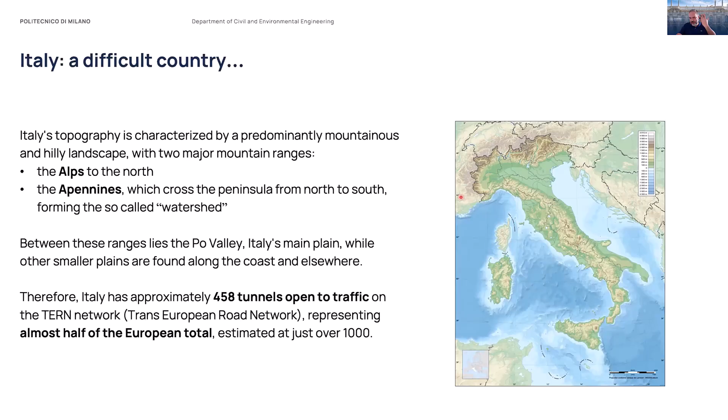As a matter of fact, if you look into the figures, you realize that Italy has approximately 458 tunnels open to traffic. We're speaking about road tunnels, which is something like slightly less than half of the European total of this trans-European road network. So it's a lot of tunnels. Actually, in this area here, I heard a statistic once that in this small area, which goes to France, we have a number of tunnels which equals the number of tunnels in whole Spain. Just to give you an idea. So tunnels is a big topic for us.

As a matter of fact, if you look at some notable projects in the last years, you realize that there's been a lot of work going on in this topic. So we have a new line from Napoli to Bari, which means basically from Naples to the other side of the peninsula, facing Albania and Greece. Then we have some new galleries in Sicily on the main direction from Palermo to Catania.

Other galleries, I would like to mention this gallery here, of which you see the data here, which goes from Milano to Genova. This is a strategic infrastructure, of course, because Milano doesn't have the sea. Genova is one of the largest ports in Italy, so you can appreciate the importance.

There is also one side effect. This allows the people from Milan to go to Genova. The people from Genova don't like the people from Milano, but they have to handle this.

The statistics here are in Italian, but you can appreciate the importance of this gallery, this Valico gallery. So we have 53 kilometers overall, 70% of which are in gallery. The speed of the train will reach something around 250 kilometers per hour. It's not the maximum of the high-speed trains in Italy, but still a lot, and it makes Milano-Genova less than 1 hour in terms of time. Here are other data, but I will move on.

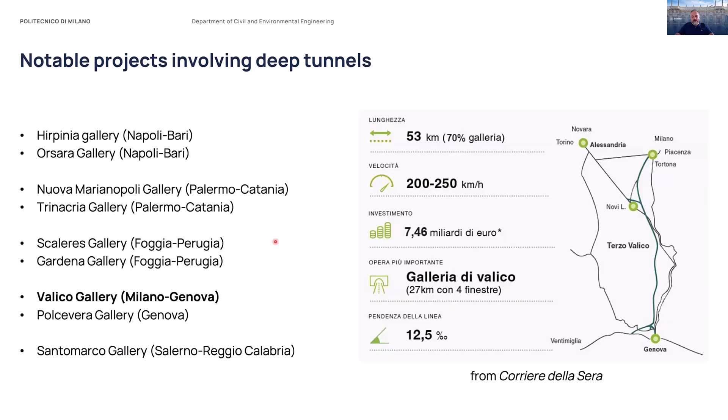And this goes well with the presentation by Thomas previously, because he spoke about shallow tunnels, so we complement each other. Just to mention that differently from some of the structures we saw before, deep tunnels have a simple geometry. Basically, you have the lining, which, if it's a deep tunnel, should usually be a circle.

Of course, there are other possible shapes, but the most optimized shape is typically the circle because of the surrounding pressure, which could be, as a first approximation, considered as a uniform pressure. And then there are typically some inner portions with vertical and horizontal partitions, which also could require some study.

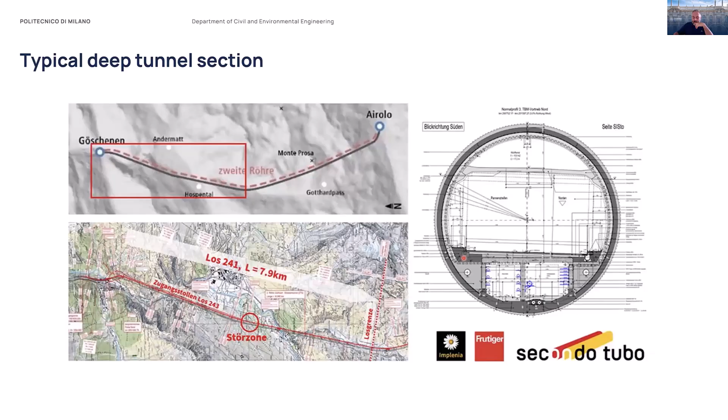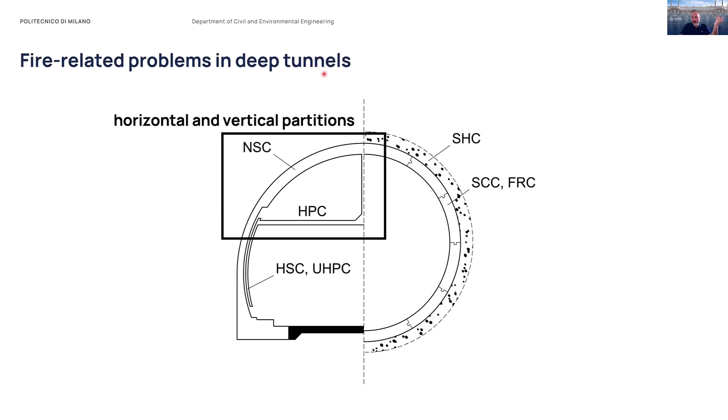So just to break down the problem into simple things, I would mention that in fire-related problems that involve deep tunnels, we are typically faced with two types of problems. You have horizontal and vertical partitions where you could face a local problem, which of course is not less important because it implies disruption of the traffic and therefore huge economic losses, not to mention the possibility of having human losses. But this problem I will not focus on because mainly from our experience, it can be tackled the way Thomas did with shallow tunnels. If I was to simplify it to the most, I would say we're talking about beam-like elements and column-like elements.

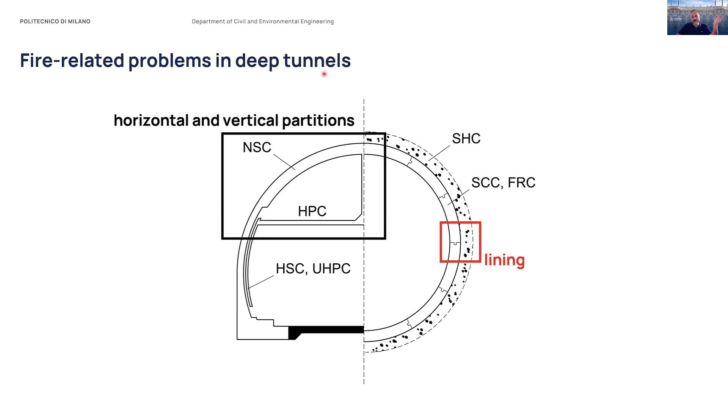What I'm going to talk about today is the lining problem, because on this type of problem, we did some work during the past years and we also compared different approaches. We are now working in a FIB group on a bulletin which should outline what the best way is to approach the problem. So I will show what has been done concerning SAFIR in terms of modeling and also in terms of main results, which are interesting to outline a little bit how the problem looks.

And inside this problem, in my opinion, and from what I saw during the last years, there is one main problem. One main problem which may appear simple, but which has to be tackled in a correct way if one wants to do things properly. And the main problem in modeling deep tunnels is the soil structure interaction.

Now, what happens typically is that the design is governed by ambient temperature conditions. And more specifically, in this respect, a key role is played by the load exerted by the soil on the lining. So what typically happens is that there is a geotechnical analysis with software. I put here two names I'm aware of. Plaxis and FLAC are probably the ones which are more often used in Italy. And then the results of this analysis are provided to the fire engineer, to the fire expert, as a sort of initial condition to be used in the structural fire analysis.

So what you receive is the geometry of the lining, and you receive a distribution of normal stresses sigma and tangential stresses tau on the outer surface of the lining. Now one has to handle this load very carefully, otherwise you will lose part of the problem.

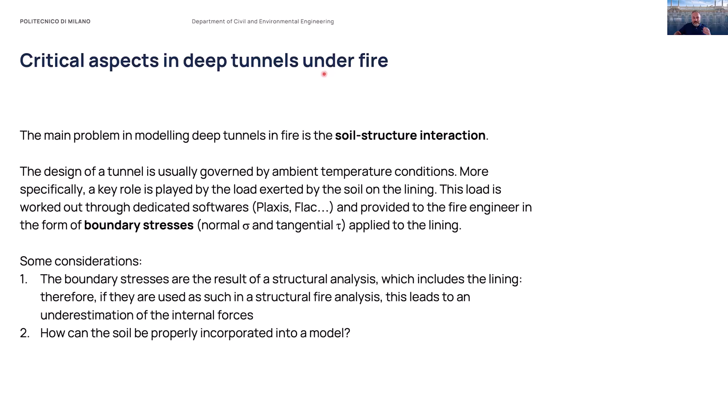And then, of course, how can the soil be properly incorporated into a model? How can it be modeled in such a way that this condition is respected and its interaction with the lining upon fire is correctly captured? For the first problem, I already spoke my mind. You should always use as boundary stresses those immediately prior to lining insertion. This is usually not a problem because the geotechnical analysis is performed in different steps, so you may ask the geotechnical people to provide some stresses before the lining is inserted.

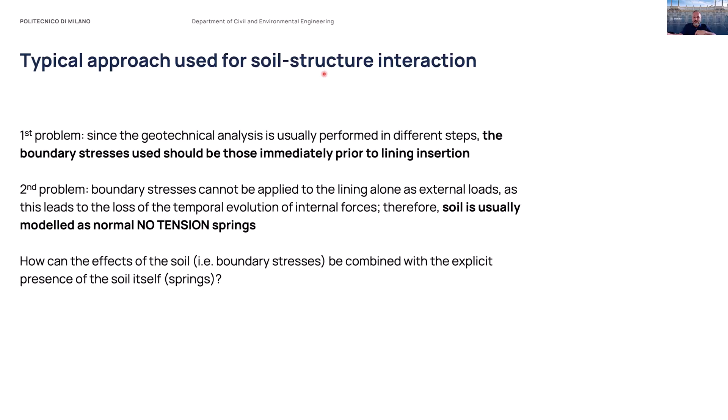And then the boundary stresses cannot be applied to the lining alone as external loads, because this would imply constant loads, and this is typically something which does not take place in fire, especially if we have statically indeterminate structures where there is an evolution of the internal stresses. So you should do something else. To capture the soil behavior, soil is usually modeled as normal, no-tension springs. But then how do you apply the loads simultaneously with springs at the boundary?

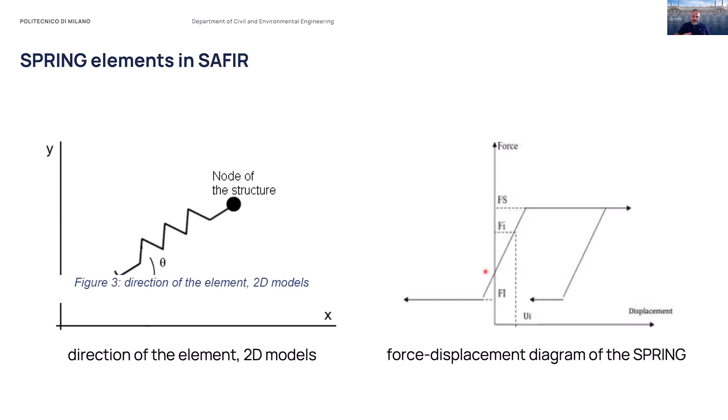Because as you see, it is an elastic, perfectly plastic constitutive model, which allows, upon proper definition of the upper limit, the lower limit, and the offset between the two, to define a certain preload in the spring. So you could add something which is like a load which is in the spring when the spring is in the zero position. And this, in my opinion, is the key to the problem.

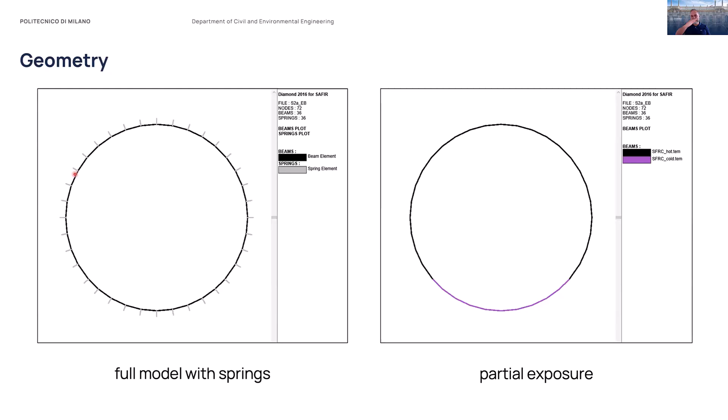Here is the model, the typical model of a deep tunnel. This is the geometry. So you see, we make the geometry with beam elements. This is the circle. And then you have the springs all around, typically at a certain distance from each other. This can be taken into account in SAFIR by defining the area and the constant and properly transforming something that is like a subgrade into concentrated springs.

So two possible solutions that I've seen done in the past: soil is modeled as a spring, the lining is modeled as beam elements. The pressure P0, which is the boundary stress, the initial condition which I mentioned before, is applied as an external load to the system which is formed by the lining and the springs. Now, if you assume an elastic behavior and you go through some simple equation, you realize that this results in the pressure being shared proportionally to the stiffness of the two components.

And this leads to a problem because if your springs are no tension, to model the fact that the soil is not able to carry tension, the soil will be subjected to tension, and this will lead to numerical issues because basically the lining will have no boundary restraint. So it will result in something being able to move around, okay?

On the contrary, if you use the same modeling strategy, but you use the pressure as an applied preload to the springs, by doing the same passages I mentioned before, you end up with the same pressure in the lining, and in the soil represented by springs, the pressure is rather a decrease of pressure. So the springs will remain in compression and you will not have any numerical problems.

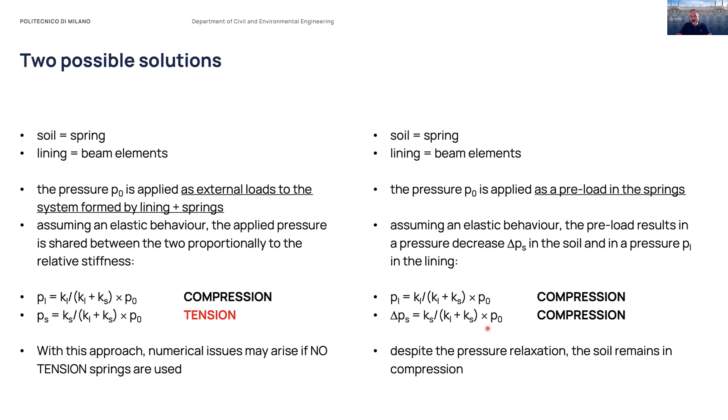And these equations, for those of you familiar with it, resemble very much what you get when you evaluate the elastic loss of pre-stress at the beginning of a pre-stressing procedure. It's exactly the same. It's two elastic entities which interact, one of which is pre-stressed, the other is not. And you get more or less the same equations.

So going further, this is what it will look like in the SAFIR input file. So you have the definition of the springs. Here you see the angles which range from 180 to minus 170. It's of course the worst case when you have to model all the lining, because geotechnical people are very accurate and very precise, so they hardly ever have a perfectly symmetric distribution of stresses. There is always something that gets in the way, so you have to model the whole lining.

If you model only half of the lining, it would be much easier also from the point of view of numerical stability. You could take into account symmetry with perfect restraints, and this would simplify things by a great amount. Here, I would focus on the last column.

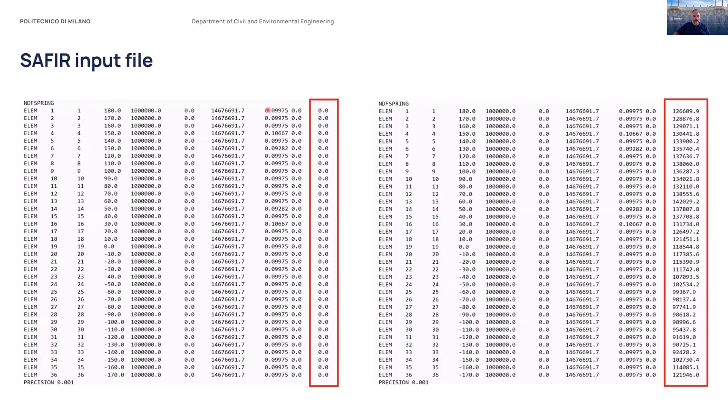This is where you could define the pre-stress. Of course, it's entered in Newton. I think I got the units of measure right. The others are limit values, one in compression, the other in tension, the elastic stiffness, and I think this is the area of influence of the springs, if I remember well. So this is how this aspect could be implemented into SAFIR.

So now a little bit on the model and how we used all this. We did some expertise work. I cannot show that. I will show what we are working on, and it's a paper which will be published, I think, in the near future. We compared, as I said, different modeling strategies. One is SAFIR, the other is Abaqus, so another type of finite element software, and another is a simplified approach we've been using a lot in the last years in Milano.

So here is a reference model we built with the following data. Nothing specific to mention other than the fact that materials are basic materials with 30 megapascals and 500 megapascals strength. We use the new mixed curve, which is provided in the new Eurocode, so a curve which is not two bounds. It goes from what was the upper bound, then it goes to the lower bound, and then we consider possible different stresses applied on the lining, one in the vertical direction, the other in the horizontal direction, because the fact that you have a uniform pressure is hardly ever the case in real applications.

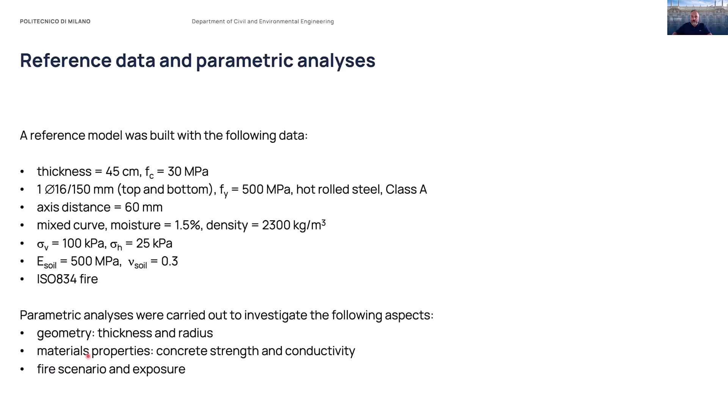And as a reference, the ISO 834 fire, because to understand the phenomenon and to see how things evolve, the ISO 834 fire is as good as other fires. Here are parametric analyses we carried out looking at the geometry, so thickness and radius effect, the material properties, concrete strength and conductivity, and then the fire scenario and the exposure, which is of course interesting when you have the type of geometry I showed before.

Some results. This is, for example, the role of the radius. What I would like to mention here is that, okay, we have to be precise on modeling the initial condition, but then when fire takes place, as you see, there is such a big increase of the axial force that it offsets in a certain sense the initial condition. Here, the axial force is plotted inside the lining, but you have to think about the fact that this axial force is directly linked to the pressure exerted on the ground from simple equilibrium considerations.

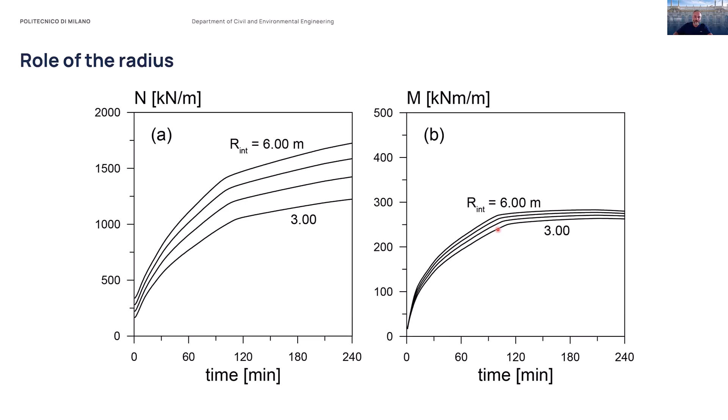On the contrary, the bending moment does not vary that much if you change the radius from 6 to 3. And this is because the bending moment is rather an axisymmetric effect. So the lining is a circle because of symmetry. It cannot become something else than a circle. So this is rather a perfect restraint moment, which mainly depends on the properties of the section rather than the overall geometry. Then this is the role of concrete strength.

Here there is a visible effect also on the moment because, as I mentioned, if it's section related, if it's section based, then of course increasing the strength leads to a higher bending moment. So this is expected. Changing the strength from 30 to 50, you see an increase.

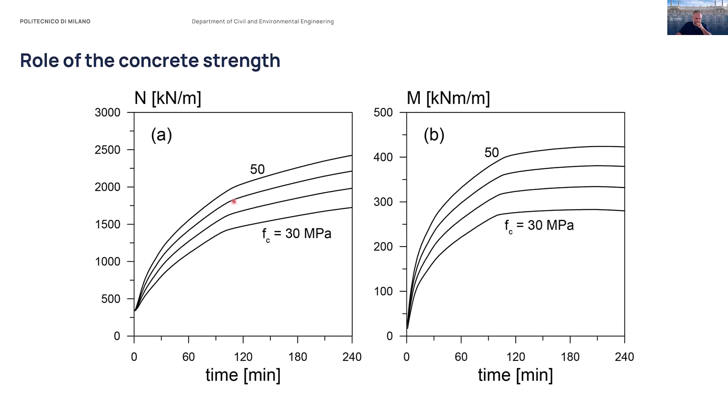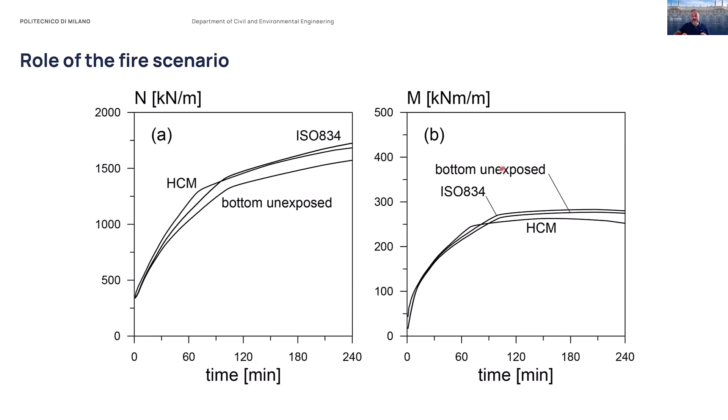You can see that if you focus on either the axial force or the bending moment, the results look pretty much the same. As a matter of fact, the bottom unexposed, so with areas of cold concrete, this could even result in a worse situation because of the restraint offered.

One thing which is interesting and which is much simpler in a beam-based element like the one I showed, rather than in a model which you could develop with a software like Abaqus, is the inclusion of joints, because joints in a beam-based element can be included as hinges, which are very convenient. You use the beam release function, I think it's called in SAFIR.

Again, not a big difference in terms of axial force if you consider no joints, two joints, or three joints, but a very significant difference in terms of the deformed shape, because you can see here in the case of two joints, and here in the case of three joints, there are big rotations which take place at the location of the joints.

So this has to be taken into account, because these locations may be required to have some additional checks in terms of rotation capability. If nothing else, simply because of the detailing, there can be portions of the joints which are not allowed to rotate with respect to each other. Still, if you look again at the bending moment distribution, you will see that the maximum values of bending moment are not that much affected. They simply have the zero points where the joints are located.

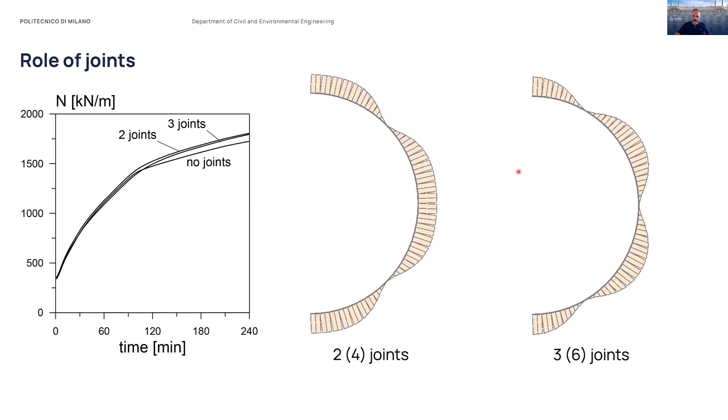What we are usually asked when we do this type of analysis is, so did the model reach collapse? And we say, no, the analysis ran to the end, which means the tunnel did not collapse. And then people are suspicious because they say, so you judge on collapse or not simply on the basis of the output of the software? We want to see the comparison in terms of M-N envelopes.

Okay, so this is the comparison, for example, of the output from SAFIR, which are the dots here in different colors, with independent calculations we did with another homemade software. And you can see that these points are always inside the respective interaction envelope. So you have to compare the blue with the blue, the pink with the pink, the purple with the purple. And this also explains why all the curves I showed previously, at a certain point, flatten, because basically the system tends to attain its ultimate or plastic limit capacity.

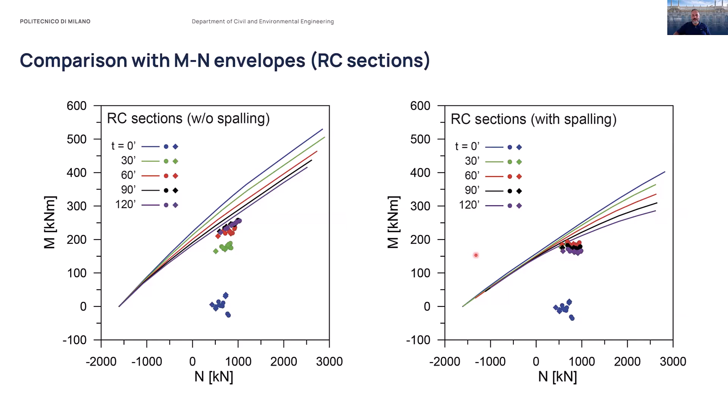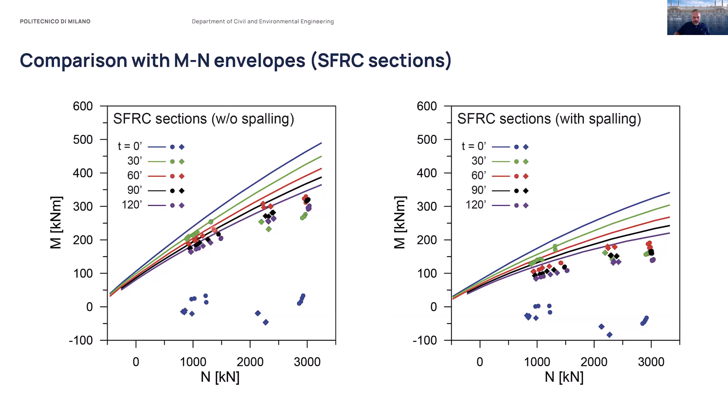Same takes place in the case of no spalling or with spalling with SFRC sections. So not that big differences. Of course, the colors are decisive, because otherwise you would judge that these points are outside of the respective interaction envelopes. Just to mention one thing that was mentioned before, looking at the stresses, again, there are people who are suspicious even in the case of interaction envelopes, and then they ask you, okay, but show me section-wise what happens in terms of stresses. No problem.

So three types of the same verification: the analysis which runs to the end, the interaction envelope, section-based, and then the stress verification, point-based. So everyone is happy when they see that.

I remember one discussion I had many years ago with Professor Franssen, when I gave to him the question which was posed to me, and he simply replied to me, when you do nonlinear analysis, the checks are implicitly included in the nonlinear analysis. This is a concept which is very simple. It's sometimes hard to get it across to the people asking for the analysis.